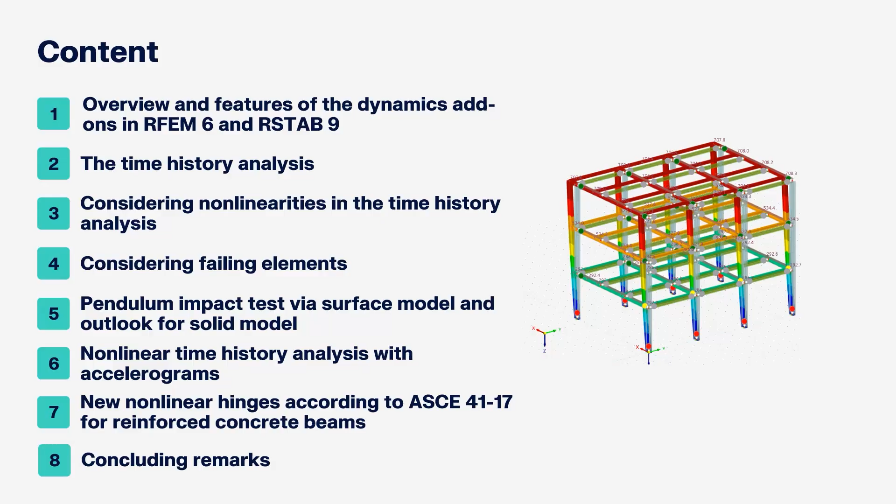Well, this is like always just some tips from myself. So let's go right away with the introduction and overview on our features.

We have the modal analysis add-on, which gives you the opportunity to investigate modal properties of our systems, for example the modal frequencies or the modal eigenshapes and modal masses in general, all that stuff.

Followed up, there's the response spectrum analysis add-on. It creates states of the system according to an eigenshape, and the states have internal forces and deformations. We get these results for each shape, and according to the standard they will be combined, for example with a 100%/30% rule, CQC rule, or SRSS rule. Well, the 100/30 is more for the directions. So in the end, we will get an envelope of internal force results, which can be used further for the design.

Then we will go into the first nonlinear analysis, which is the pushover analysis. First it looks quite complex, but the theory behind it is quite simple. It's two parts. The first part is we get the force deformation curve of the system under horizontal load. So the analysis is quite simple: we just press the system from one side until it either reaches a wanted point or it breaks.

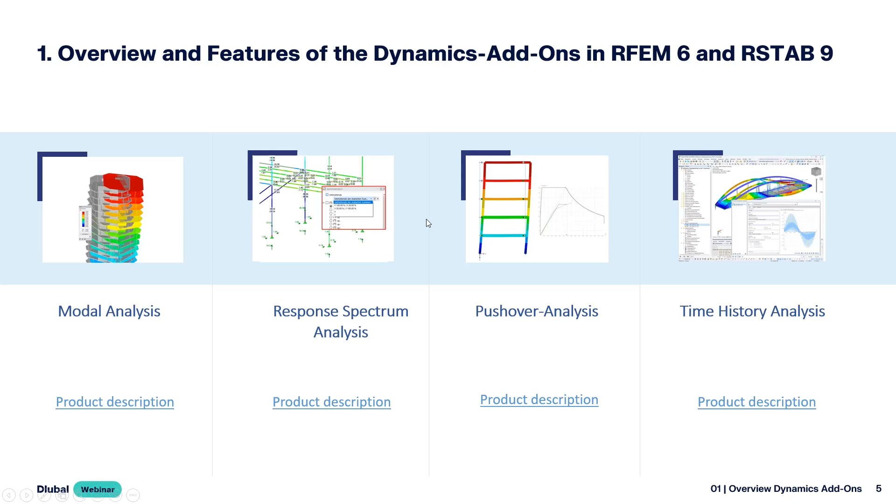But we're going to have a look at that today. So I'm quite happy to show it to you. So let's go on. That's quite a step too far. We're gonna start quite simple.

Let's go within our program. The first thing is we're just gonna validate that simple nonlinearities are considered within our new analysis type. Therefore, I prepared a simple model. It's just a column, a reinforced concrete column with, I think, 30 times 30 centimeters.

5 meters long. It's fixed at the bottom, and also we have two cables, one at each side, and this is what we want to verify.

For the masses, we have the self weight of the system as well as one kilonewton force on top. That will be our mass matrix. And for the loading, we have 100 kilonewton, which we will apply with a simple sinus function of 0.5 times t. So in 10 seconds, it will just go once to one side and once to the other side.

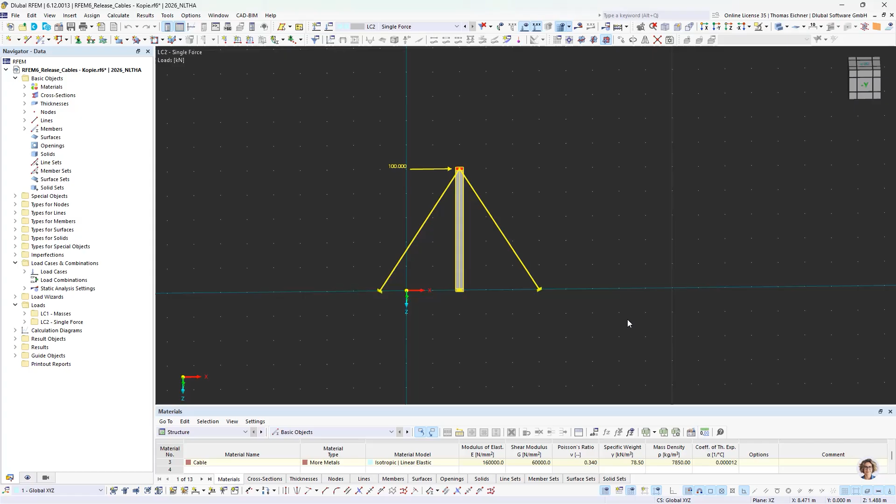What we want to verify is that the cables will fail if they are under pressure. And that's the investigation we will go for first. For the investigation, I also want to show you what is needed for this nonlinear time history investigation.

And that's quite some present, I would say. Let's go for the base data. For our add-ons, there's nothing selected yet. And if we want to go for a time history analysis, we don't care if it's nonlinear or linear, we're just going to press the time history analysis button. Well, the modal analysis is always needed as soon as you want to do anything with dynamics in the program.

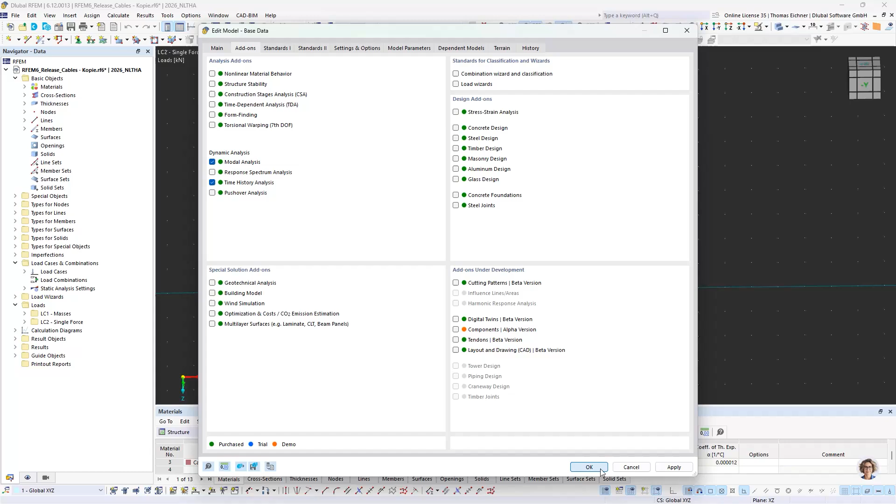So what you can see here, we don't have another add-on implemented. We also didn't change the price of this time history analysis add-on, which means if you already purchased the time history analysis previously, you're just gifted with the nonlinear solver. Also, if you would buy it now, there's no change in price for it. So feel free to get it as long as it is like that, because that's quite a gift, I would say. Okay, let's go out of it.

We activated the time history analysis. And now we will go for the first step. We will go for our load cases. So there are the same possibilities as in the linear time history analysis. We can go for load cases or load combinations of the type time history.

So let's go first with a load case of type time history. So I'm going to copy this load case 2, so I will also have the loading within the load case. Then we will change it to a time history time diagram. Let's name that load case 'time history analysis time diagram'. That's quite cool. And okay, so there it is.

We can select that. We have our masses already selected here, and we can go for our time diagrams. We will go for a function time diagram of sinus 0.5 times t.

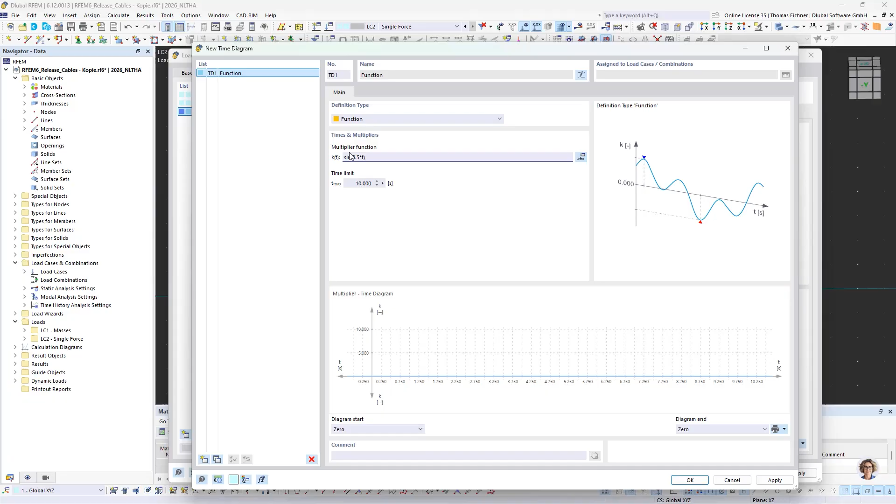Always consider only using points here and not commas. Commas are used for other functionalities in this function. We will go for 15 seconds here, and we will only calculate until 13, that will be enough. The time diagram max limit will be 15 here. So we have two, one in each direction, just for verification.

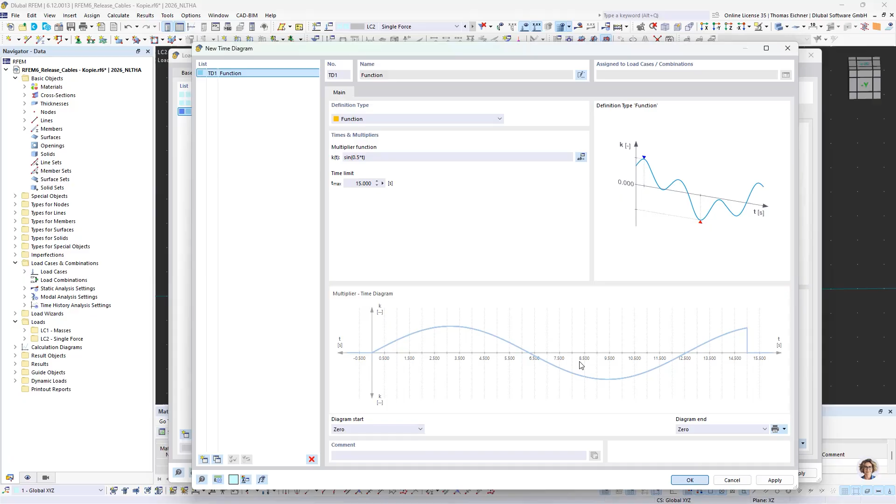Okay, there we have it. This single force load case time history analysis time diagram. It's a long name, let's delete that.

Now we will go for our time history analysis settings. Let's set the linear one first. We have the linear with 13 seconds, and a time step of 0.1 seconds, which is saved. The saved time step we will split even further by 1000 steps.

Since we also have cables in the system, I think I have the basic division of members set to 10. So we have 10 divisions for members, and cables make it quite unstable, so we will use quite some time steps in that case.

For the calculation parameters, I don't really care about the rest. We will only go for the x direction here, and that's all. We can stay with the consistent matrix, even though it wouldn't make any difference with the diagonal in that case.

Then we will go for the damping. The damping, well, I just selected it - there's not too much physical meaning behind it, but let me try to get a physical meaning out of it. Let's say we have a frequency of 100 Hertz. I'm not sure if the system has an eigenfrequency of 100 Hertz, I have no clue, but let's assume it has a frequency of 100 Hertz, which would dominate the structure's response. So I want to dampen this frequency by 10%. That's quite high damping, I would say, but that's the thinking behind inputting that value.

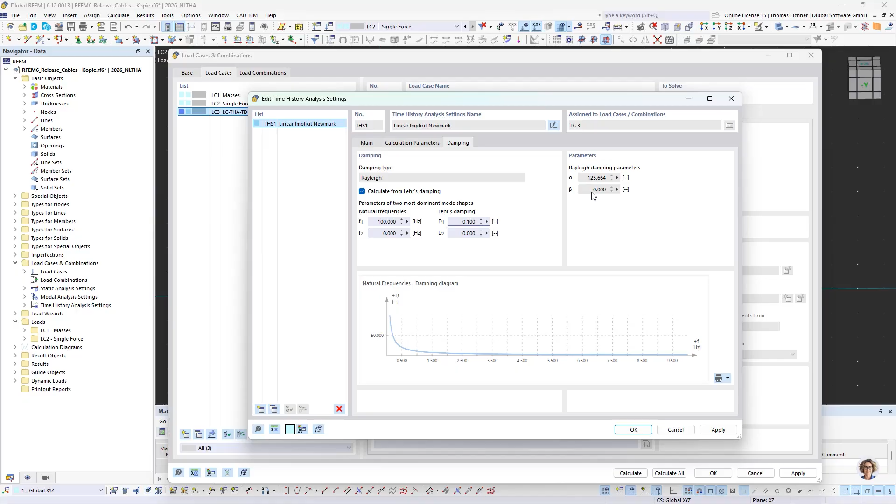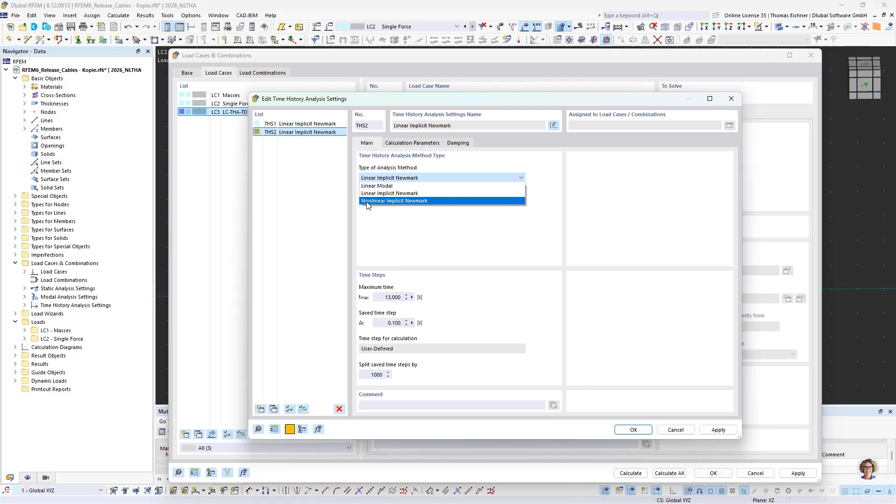Okay, but that's it, it's already done here. What we will do next is we want to do a nonlinear time history - that's all we are talking about today. And it's quite simple: we have the linear settings done, we just copy it and change the solver to the nonlinear implicit Newmark one. And it's finished, so that's quite straightforward and simple.

If you have some systems to test it, just try it out. But also maybe try increasing the time steps as well and play with the beta damping too, please, that will help a lot. Now we will just accept it, and I will directly select this nonlinear solver for this load case.

For the next load case, I want to go with a time history analysis of accelerograms. So with that, also the nonlinear solver, also the same masses, we can select an accelerogram from our library - let's take it from Chile, I don't know what that is exactly. Let's go for some 16 seconds, that's okay. Let's go for the Valparaiso aftershock, for the Chile earthquake. It's quite small, that's okay, just going to take it.

Just to have some accelerogram time history as well in that calculation. Okay, and with that we have all possibilities of the load case time history analysis.

Now we also go for load combination time history analysis, and that's like my favorite. I'm almost only working with those load combination time history analyses for time diagrams. They are not available for accelerograms, but for time diagrams, I almost always take load combinations.

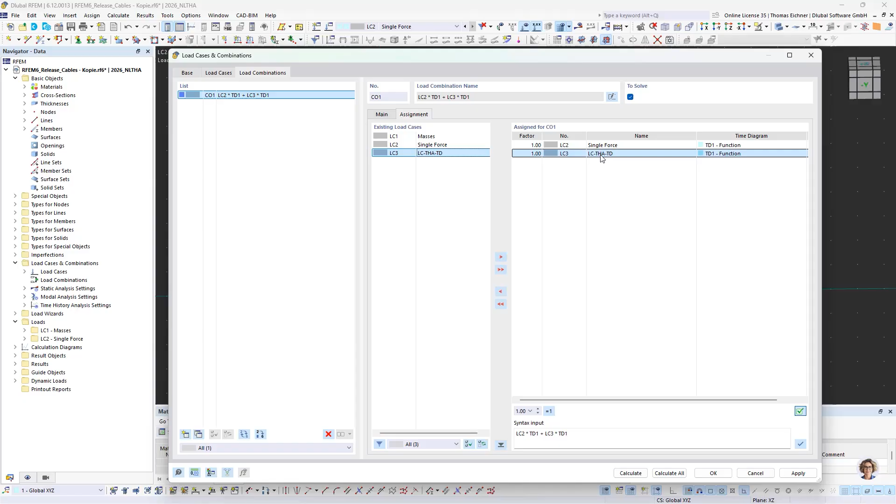We could also go for this direct option. We could use that, and it's automatically filled with the right time diagram that is used in this load case. But we don't need that.

So here we will go for the differentiation. We will make one for the linear time history analysis, and we will also go for one nonlinear. Let's call it CO-THA time diagram, linear. And the second one will be the same but nonlinear, and we change the solver there.

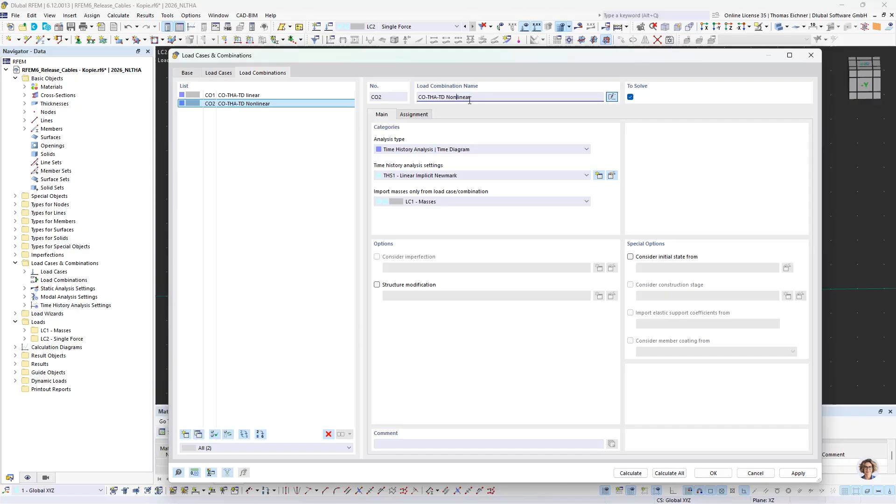Quite forward, that's done. Let's just calculate it. Since it's gonna take 3 minutes and I really want to show you some stuff today, I want to first show you we have 4 time histories. They are all done at the same time, calculated at different cores. That's a difference to RFEM 5, where it would all need to be calculated one after each other, so it's quite a ton faster than the other variant. However, I really don't want to wait this long.

Let's just switch to my prepared results model. I also prepared all the results for our further models since it's needed. Let's go for the results of this time history. We will start with our load combinations linear one.

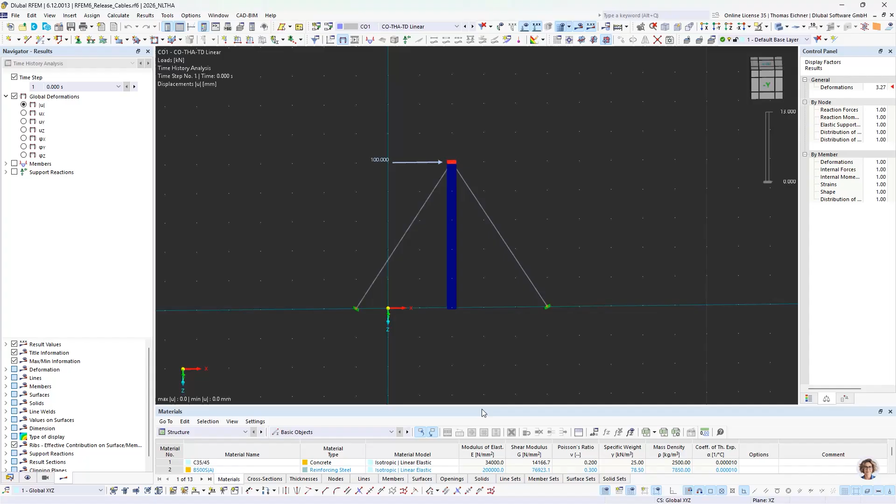For your information, the best way to investigate the results is either using these calculation diagrams, which I prepared here already. For example, we can see the maximum deformation in the graph. Just select the time history analysis here, so you can have the result type time here.

Let's go and create one new one. Let's go for load case 3. No, we want to have the linear load combination, just as an example for creating those time diagrams, those result calculation diagrams. We will go for members, internal forces, normal force of this cable. So the thing is, we wanted to see if it's failing.

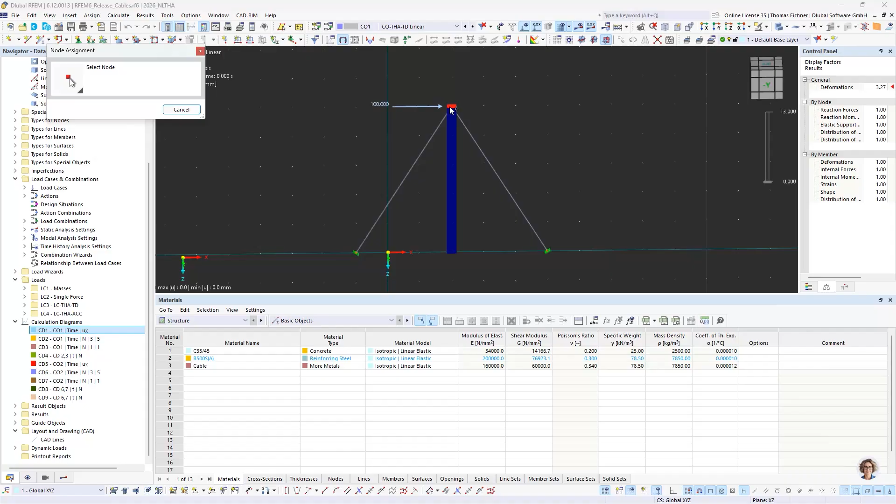And since we are in the linear time history analysis, we see it's not failing. It's first gonna take tension force, and then it's gonna take pressure. So the pressure is just wrong. It should fail here, right? That's the thing. But we will go for a different investigation now. Don't need to change this, don't need to save this.

Let's go for our calculation diagram monitor, which is right there. That's some cool thing, we have the same diagram. We have the possibility to show one calculation diagram while we are in the program. And also, if we now start the animation, we can see it right there. It's also going to show us where we are at, and there you also see the normal force of this cable right now. It's just gonna hold it completely with tension and pressure, and that's wrong.

So now for verification, quite simple, I'm gonna select the load combination 2, and there we have it. There's only tension force, and it's failing at the pressured region. Let's start the animation on that. We also see it's running quite better here. We also have way different, bigger deformations. Well, not way bigger, I mean in the end it's still fixed. It's still a column here, but yeah.

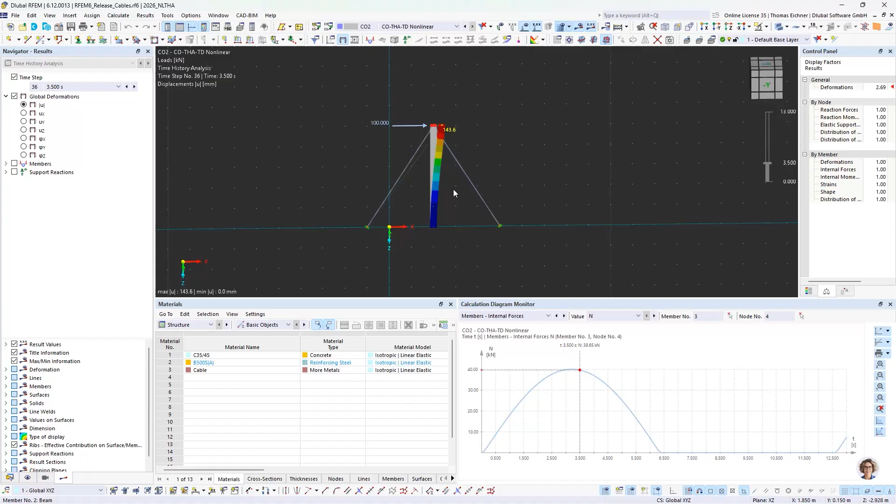That for validation there, validation is done already. We can also go for a short second, let's see at the load case time history analysis accelerogram. We also see here there's only tension forces, never negative normal forces in the cable. So confirmed again. One more thing I want to show you.

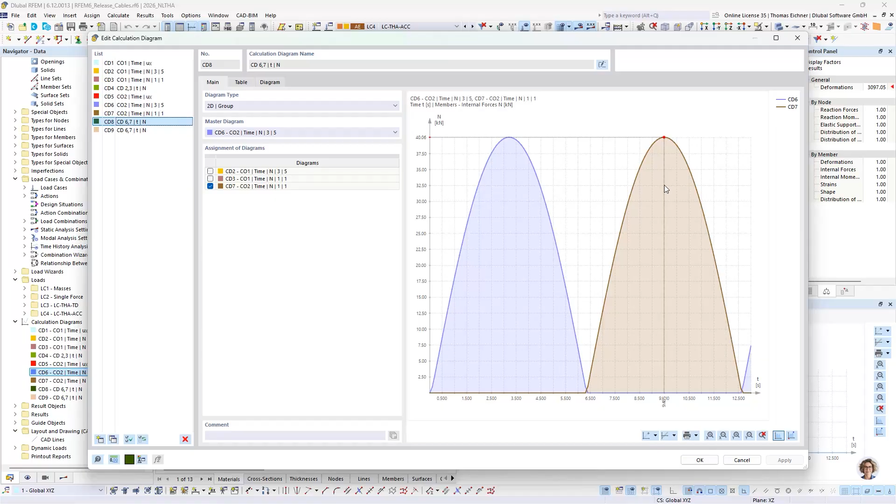Let's go for the load combination 2. This is the normal force for the left cable, and this is the normal force for the right cable. We see it's working as estimated. Also, we have another thing called the group diagram, where we can combine this diagram 6 with diagram 7, so the normal force of the left cable with the normal force of the right cable. And that's quite handsome. Okay, so first investigation done, non-linearity is successfully confirmed. Let's go for the next confirmation.

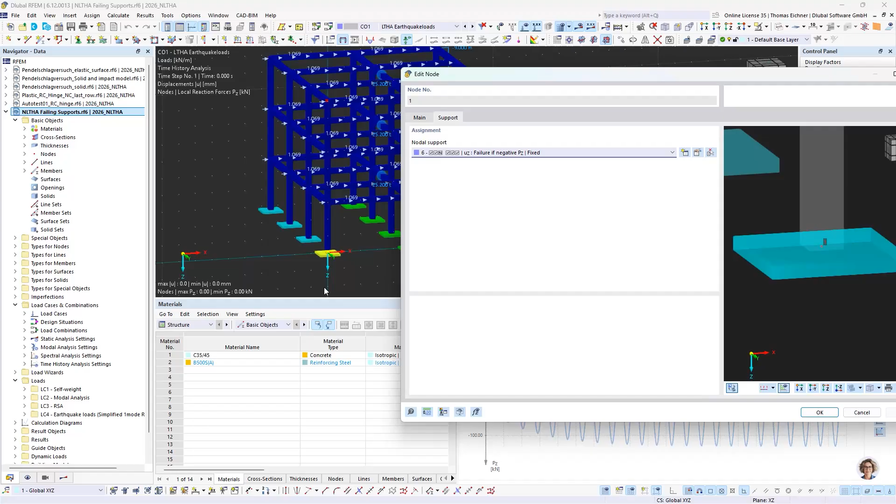And that's gonna be some failing supports. Here you can see I just prepared a model which has fixed supports, but it has failing supports if the force is pulling up. So if this Pz is negative, then the support fails.

Quite straightforward here, and we already see the results of the linear time history with the results of the support force at this left corner here. We see the loading. Well, there's just one flaw I did, I have two loadings that are a bit different, but it doesn't make a big difference. It just is a bit not anti-metric because of that. Let's see how it's going.

I'm gonna start the animation, and we can see now the supports always take support forces in both directions, as also stated in this diagram.

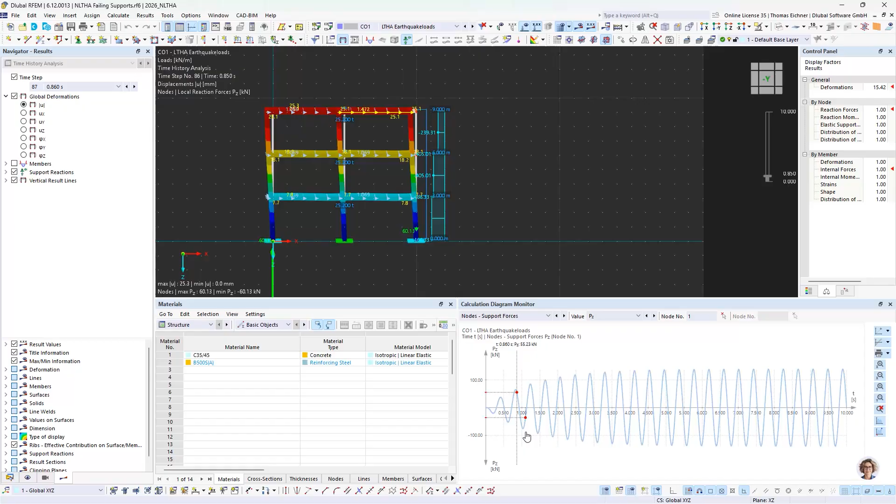What I did here is I just used time diagrams. I did quite some theory crafting on this model. What I did is I just used the first mode, so the first mode of the modal analysis is used here. It's 15.236 radians per second - it's not the natural frequency, it's the omega of the first mode of the linear system.

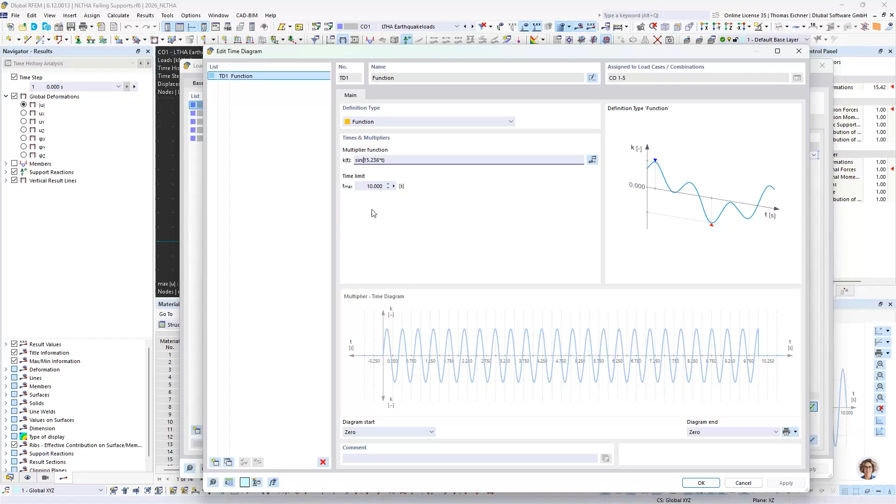I used it here and just applied the loading. I just applied the masses in the x direction. That's what this time history does for linear and for nonlinear. So the same I did for the nonlinear time history analysis.

Let's see here, as we see, it's just like opening up. I also included some damping, so we see it's kind of rising - it's always starting up and then the damping comes into place and it stops rising. I'm missing a word for that, but I think you know what I mean.

So let's switch to the nonlinear time history, and we would estimate these forces only to be positive. Let's go and see it - yeah, there it is, only in one direction. Here it's shifting, here it's shifting. We're going to increase the deformations by 100 to see it better. Now we see it's lifting up and going down again, and then this side is lifting up. So the next nonlinearity is confirmed by that investigation.

And now we can continue with the good stuff. For the good stuff, we have the pendulum impact analysis or simulation in this case.

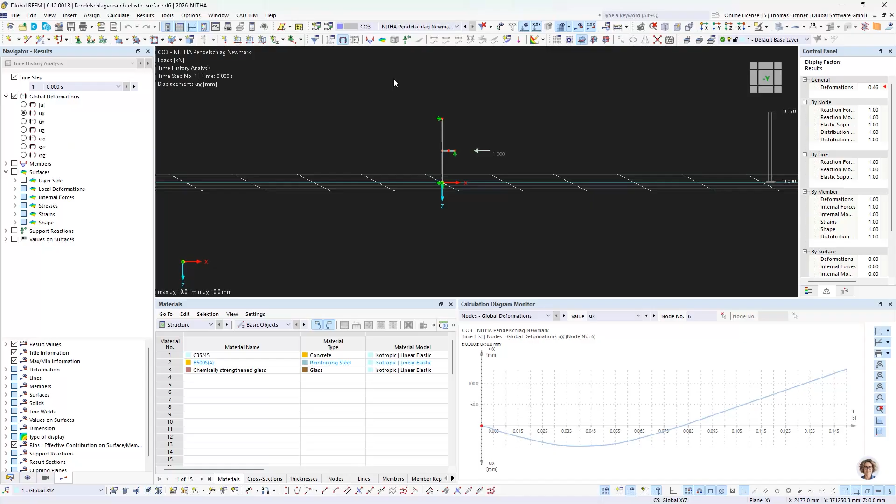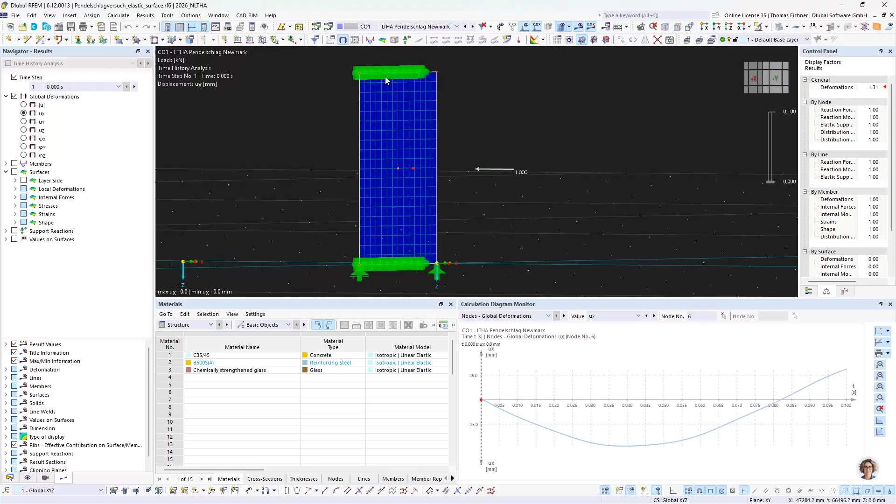Now I want to go see here. Okay, perfect, let's see first about the system. What we have there, this should be a glass surface - it's just one surface, chemically strengthened glass, 8 millimeters of thickness. We have 1 meter height and 70 centimeter length, and it's supported on top and the bottom with line supports.

Now what we want to do is we want to have this bang, this impact. Let's see what it means - that's what we're going to do. So that number 3 here, that's our surface. You see this system here, that will be our impact model. Let's go back to the presentation, so it's going to be this stuff.

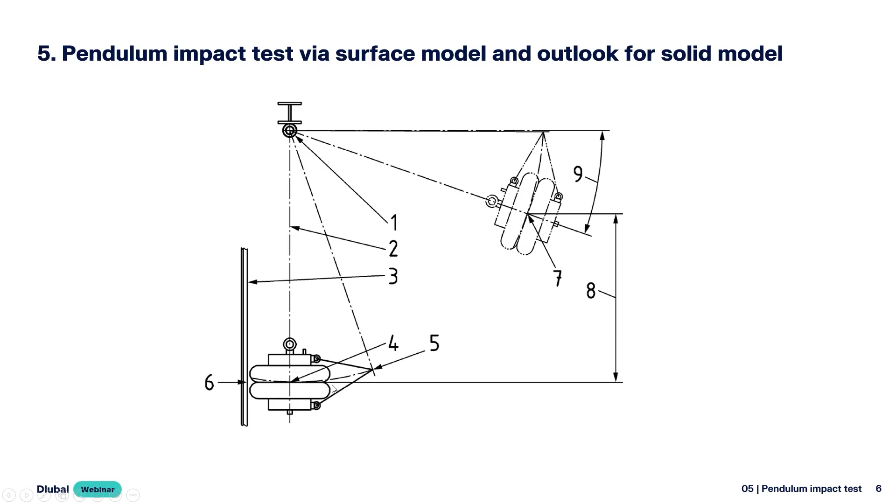The real procedure is we would have it hang up here, lift it up, and then it would be let loose and it would bang against the surface. It would just bang and then go back again - it wouldn't go there and then go there again and again. That's not what we want to simulate. It would just bang once, get away from it, and then it's away. That's what we want to simulate. So for the energy, we will see this in the results in the end.

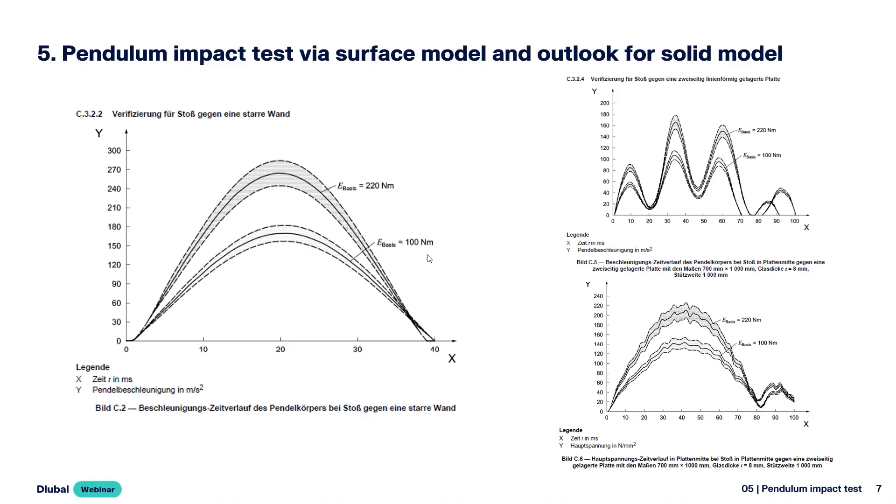However, what we can see is we will go with an impact energy of 100 Newton meters. So what we want to have is at the impact, we want to transfer 100 Newton meter energy. So how can we achieve that? Well, we know we have this impact system which has 50 kilograms - that's the mass of the impact. I think it's a tire which normally is weighted with a medicine ball, something like that. So that's the system, and it has 50 kilograms, and it has roughly a stiffness of 400 kilonewton per meter.

That's also going to be in our stiffness there. So now we know the energy of 100 Newton meter. With that, the law of conservation of energy, together with the impulse theorem, we can calculate a force F. I did leave out some intermediate steps, because the force F can be derived from the impulse change over time - so there are some formulas missing in between, but that's what's behind these formulas. The time which we take, we just pick it - we decided it's 0.001 seconds. And with this 0.001 seconds and this derived formula, we can have the mass that is needed to achieve this energy.

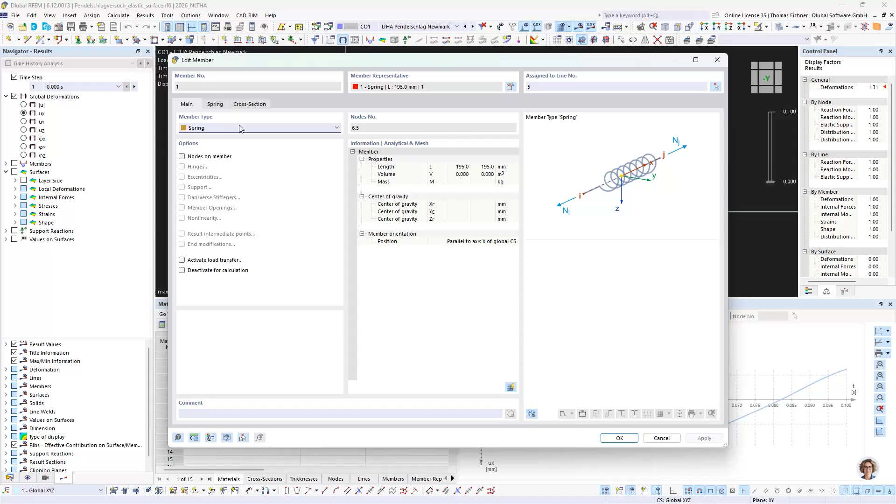Then we have the system of our tire, in this case a really simple system. It's just a spring, and the spring has a stiffness of 400 kilonewton per meter. It has no mass itself. We defined the 50 kilogram itself in our mass load case on one side.

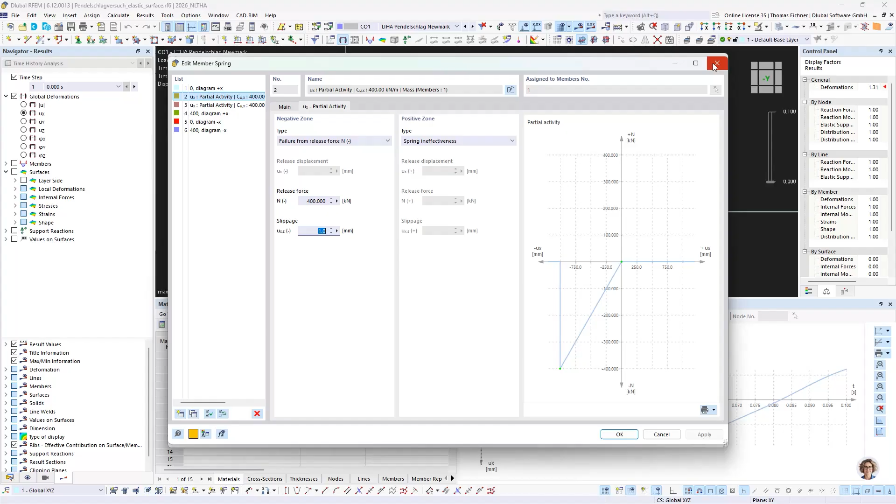And we have a partial activity, which means we can insert also a slippage of 1 millimeter. So that's the distance we need to accelerate to this 2 meters per second. And we also have a spring ineffectiveness in the other direction. So it hits, goes with the structure. Let's go out here. It hits it, goes with the structure there, and if it goes back and is not linked anymore, then it's ineffective. So that's how we make sure that it goes away after the impact.

Okay, and now, well, that's quite straightforward, and that's it already. Now we can go for the results and investigate on, well, I already calculated it. Maybe we can go also for our time history analysis settings.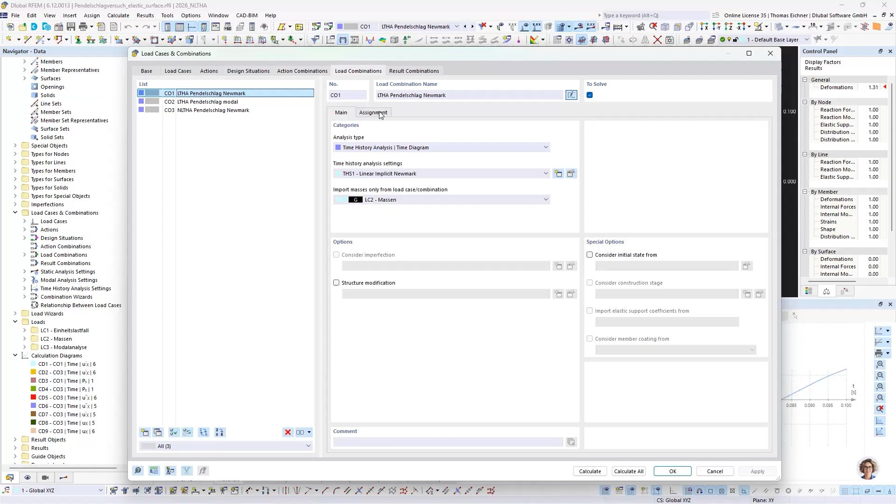So as I said, we have the masses defined in our mass load case 2. We have our unit load case with 1 kilonewton. Now we will go for a load combination where we defined, well, they are all the same. The only difference will be the time history analysis solver. So we can look at the assignment. What we did there is we have our unit load case, which has 1 kilonewton, and we assigned it with our Pendelschlag, it's a pendulum impact in German. There we have the 0.01 seconds, and we have this multiplier with 100. So that's what we do there.

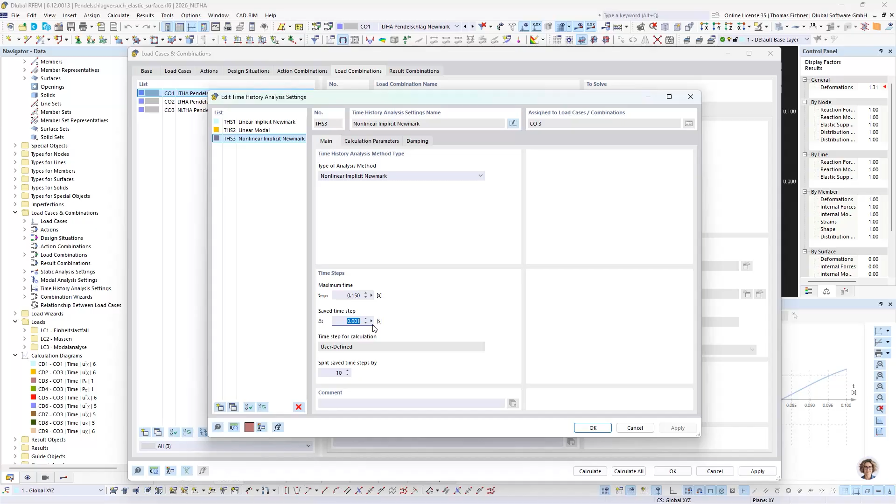Okay, done with that. We can go and look at our time history settings. In this case, I always looked at all the time steps and splits are the same, but we don't need that precise ones for the linear one. However, I just picked it the same. So now we have times that we will calculate, 0.15 seconds long. I think that's different, yeah, I did it for the nonlinear time history. I did it longer, I will show you why. We have a saved time step of 0.001 seconds, and we will further split it by 10 to have more calculation time steps. For the calculation parameters, it's a diagonal matrix with all components.

Damping, I think we don't have any damping in this case. I didn't go for damping here. We could also try to estimate some damping, but I didn't try for it yet. So okay, but with that we are done already. Well, the modal one, we can just ignore it. We won't look at that. It's gonna be the same results as the Newmark, it just needs a modal analysis first.

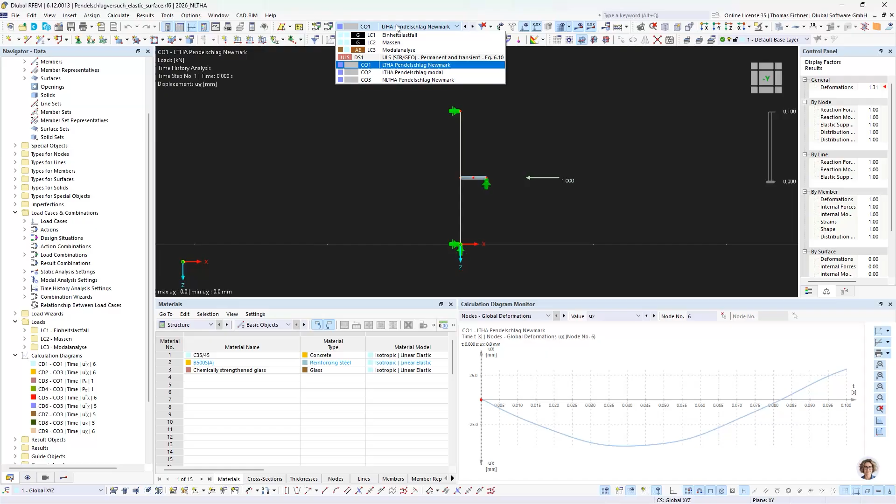Let's go for the results now. We will see the Newmark one, and we will see. Let's see, this is the UX of node 6. Node 6 is this one here. Yeah, but let's just start the animation. I will just override it a bit so we can see more. Let's factor it with 5 and start animation here.

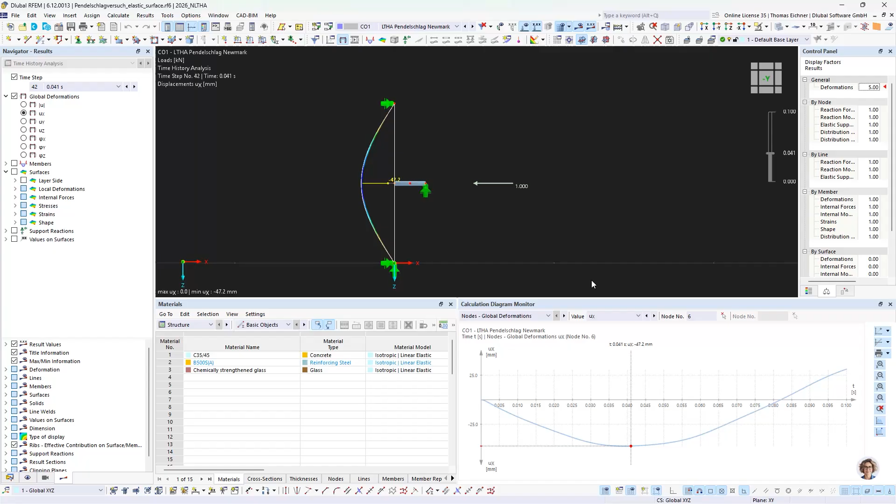Now we see it's gonna make the bang, and then it's gonna rotate a bit. The thing with the linear one is our spring non-linearities are neglected. That would mean it would still be connected in the end, and it would shift sinusoidal, it wouldn't be split after the impact. So this would just go up and then down again. For the velocity, maybe let's go for our time diagrams.

There we see it. We see here our almost 2 meters per second, which is a bit off since we also don't have this 1 millimeter slippage. It doesn't have too much influence, to be honest, but it's just a little bit off because of that. Maybe a more precise time step would also help. But what we see here, we go and there it should stop. We know this negative way shouldn't occur. That means the ball comes back again, kind of. And that shouldn't be. It should be constant here. So it's not connected. This means it's connected with the surface and it's gonna be pulled back by the surface.

That's not wanted. Now we're gonna look at our nonlinear time history. And there we see some difference. It's not gonna go this sinusoidal way. I mean, okay, it's 0.05 seconds longer calculated, but also we see here some change. It's not linear, right? And if you change it for the nonlinear one, we see it's just linear at that point. So the deformation of that right-hand side point is just rising, meaning this pendulum kind of is just going further and further away with the same velocity.

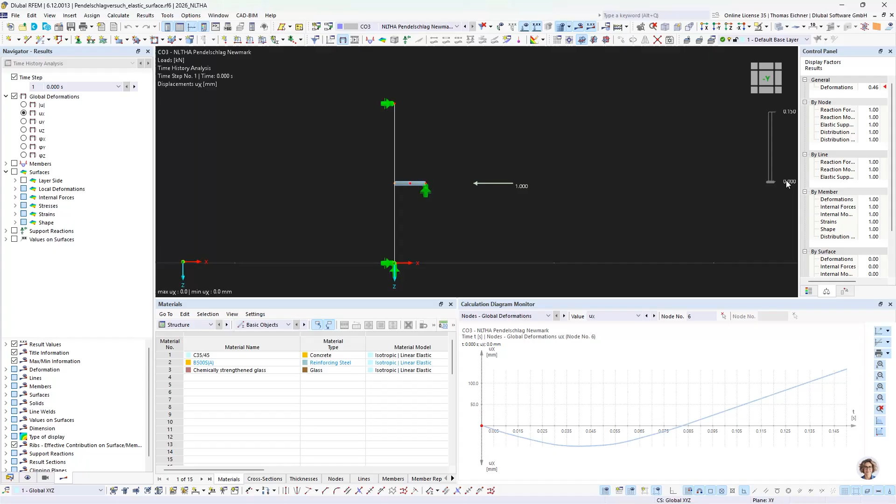We can also try to get this other point on the other side. Let's go for this. That's the point on the surface. There we see how that is going, right? It's not going further away, but it's just like vibrating in the end, the surface alone. We can also try to get it on the linear time history. Yeah, there, that point, well, it's connected. It's not right, to be honest. It's quite hard to interpret in that short time. Okay, let's stay with the nonlinear one.

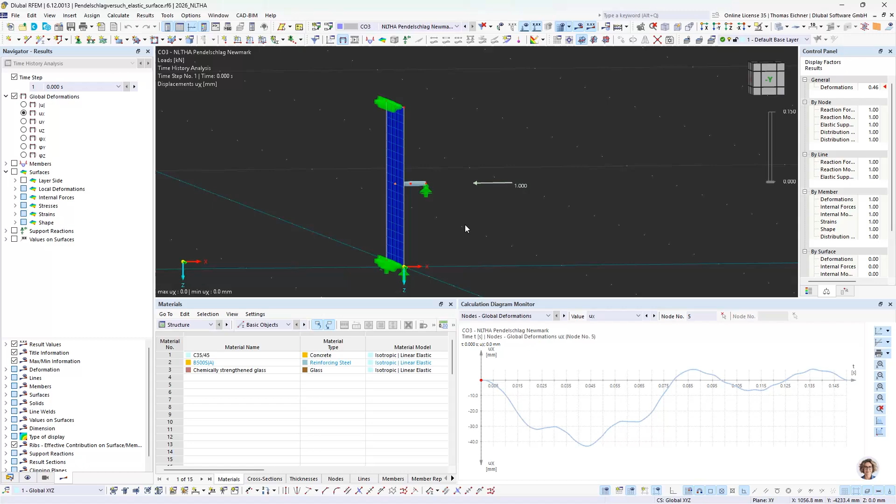And with the nonlinear one, we can also, I will stay inside that point. Let's go for node 6. Let's go for the velocities in that point. And we will go for ux, and there we will see this 1.99. It's quite close to 2.0 meters per second. That means our first theory was confirmed. We have this impact energy of 100 Newton meters, since we have this 2 meters per second. And what we also see is this constant velocity in the end. That means at that point, they are not together anymore, and like the system on the right hand side, the pendulum is just going to travel further and further to the right.

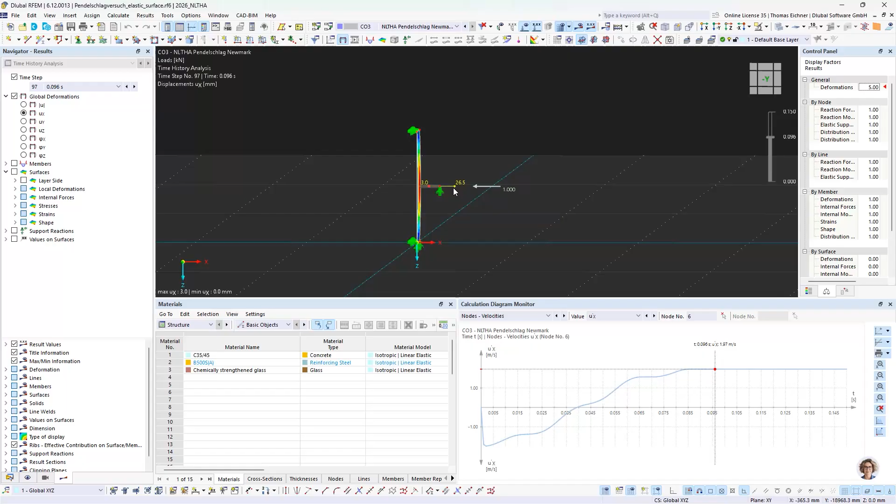Let's look at it also. Let's do it a bit bigger. There we see it. Now it's kind of together. The stiffness plays a bit of a role in the difference here, and then we see it's going to move. And yeah, it's quite working fine. We can also change the animation speed here a bit, so it's a bit too fast. Well, now it's not fast enough. Let's go here. Yeah, that's a bit better. There we see the stiffness just has some impact here for the relative between those. Now it's gonna shift and just move away. So that's confirmed again.

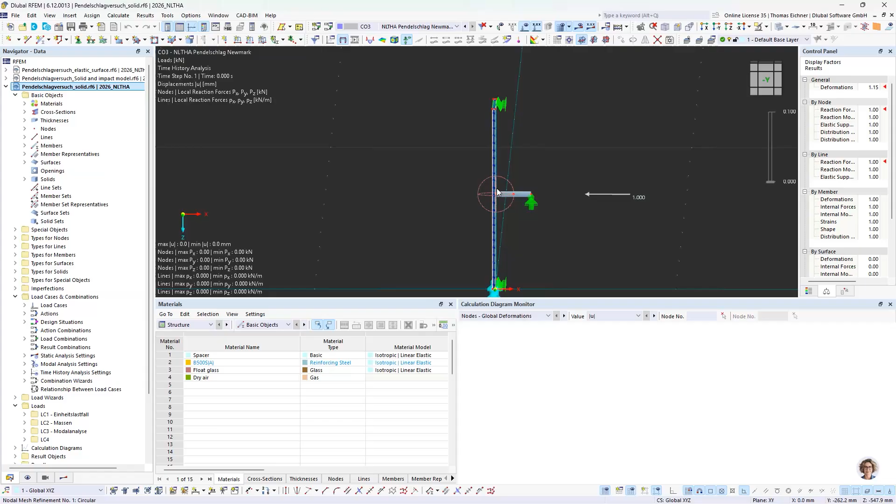So let's jump for the next model. It's the same model, but it's solid. Now on that model, what we did is we included also, in that case, double glass surfaces on both sides, and in the middle we have like air as a solid. So this is the solid model of this structure. It did need some mesh refinements here, and I also did some iterations for getting the results as they are now. We will just go straight forward, and we will go for the nonlinear time history analysis.

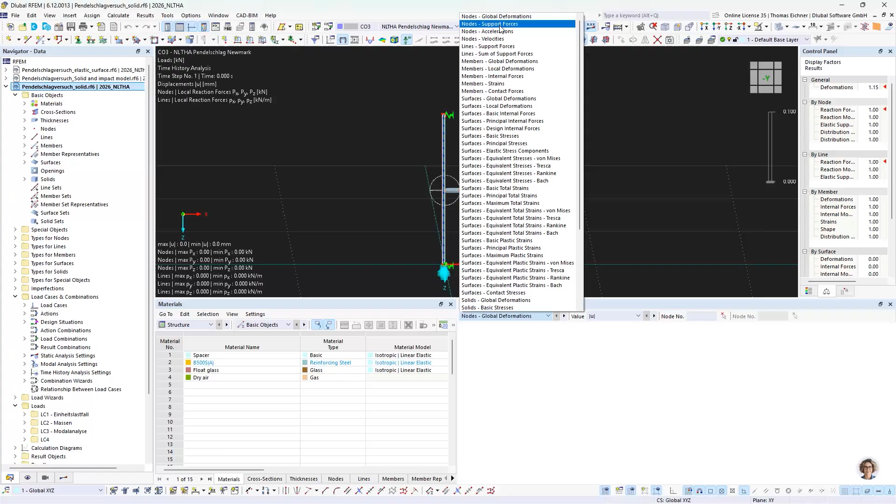And we will just go again for our velocities on the point. And we will have quite the same. You see, well, in that case, it's only calculated till 0.1 seconds, not till 0.15, but we see how it's not changing at that point anyway. So also that is working quite fine. We have also this 1.99 meters per second, so that's quite nice. Let's go for the animation in that case. We also see how it's like moving the whole body here. This whole solid model is going to be moved and it's going to go back. We see this behavior is a bit different to the surface model, especially since this is way more stiff.

Okay, and it's just for presenting you. It's quite a powerful analysis type.

What I want to say here anyway is we do not have everything in our automatic tests. And it's something we did here. We have warnings implemented. Just because there is a warning, we didn't want to block features. Let's say, for example, surface contacts with whatever nonlinearity. We don't have an automatic test for that yet. So we just want to hint out what is within our automatic tests. So whenever there's something not tested, you will find such a message here. But it doesn't mean that it is not working.

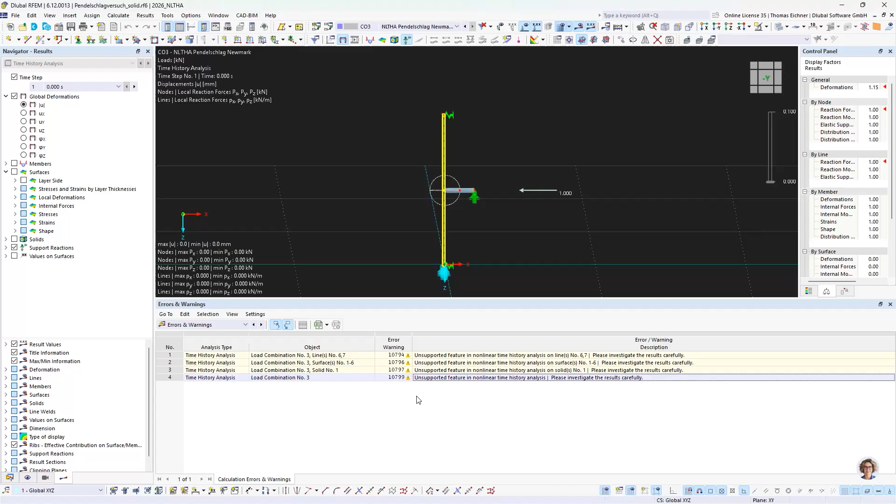It just means please investigate the program on its plausibility. We have tons and tons of features, and it really gets customers to use anything with anything, and that's sometimes dangerous for some customers. I want to have this warning displayed, just to hint out: don't trust a program blindly. I hope most of you understand that.

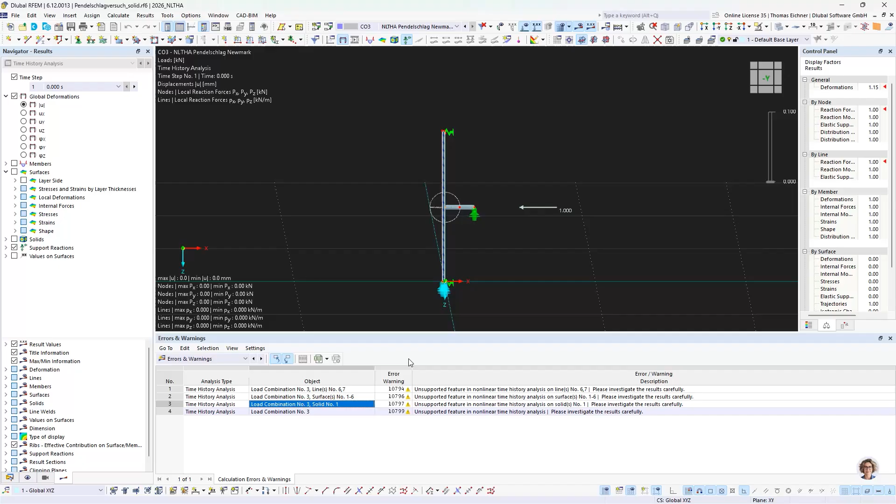So for that we also implemented a feature showing where the untested stuff is. For example, here we have the surfaces, or the most simple one is the solid, because we didn't test the solid yet in an automatic test. We just tested it on its plausibility.

Also, there are overall warnings. For example, imagine you are trying to use a torsional warping 7th degree of freedom with nonlinear time history. Nope, that's not tested yet. I'm not sure when it's going to be tested, because that would need some new studies, I would say. So there's a lot of stuff you can combine, but please investigate them carefully.

So now for the last of this pendulum impact stuff. I didn't get this to calculate quite far. Yeah, it's still getting my assert here for the changing.

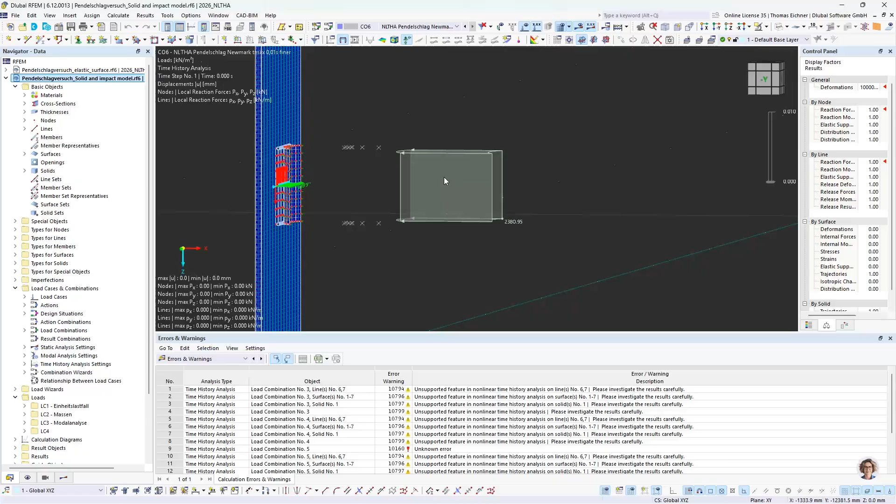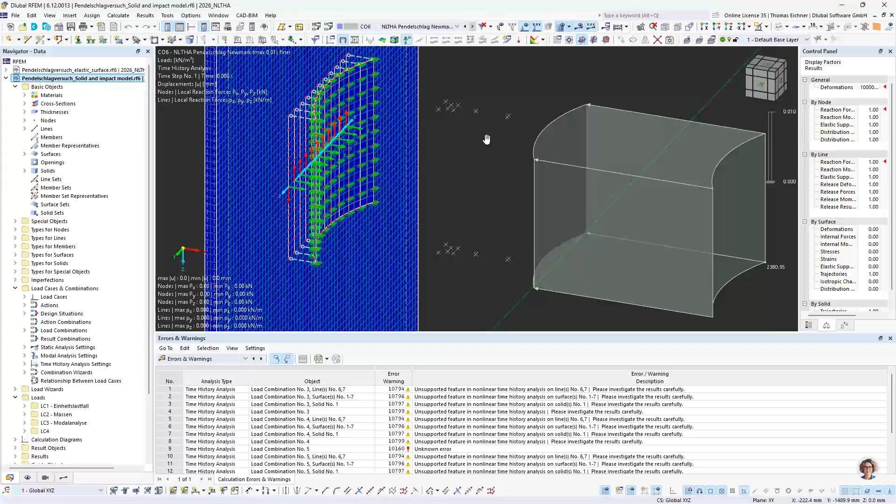That's something where I tried myself on modeling this contact more exactly. In this model I tried it with our rigid link, which is a link between two lines. There's another test where I tried it with single links at each node. It worked a bit better - well, to be honest, I don't know if it was better. I just investigated it in more detail with more complex mesh settings and time settings, but that was an iterative process. What I can say is like 2 elements doesn't seem enough in between those, and also the time settings seemed not enough for this detailing.

Okay, so I hope this was a fun bang into this area.

And now let's go further with our performance-based design. Let's see, do I have another? No, that's not. That jumped too far. Let's go for that here.

We will go now for, I want to show it in RSTAB 9, since in RSTAB 9 we also have something different there. We have a different solver than in RFEM 6. So in RSTAB 9 there's this nonlinear explicit one instead of the nonlinear implicit one. It's 2 solvers, one is geometrically linear and one is with large deformations.

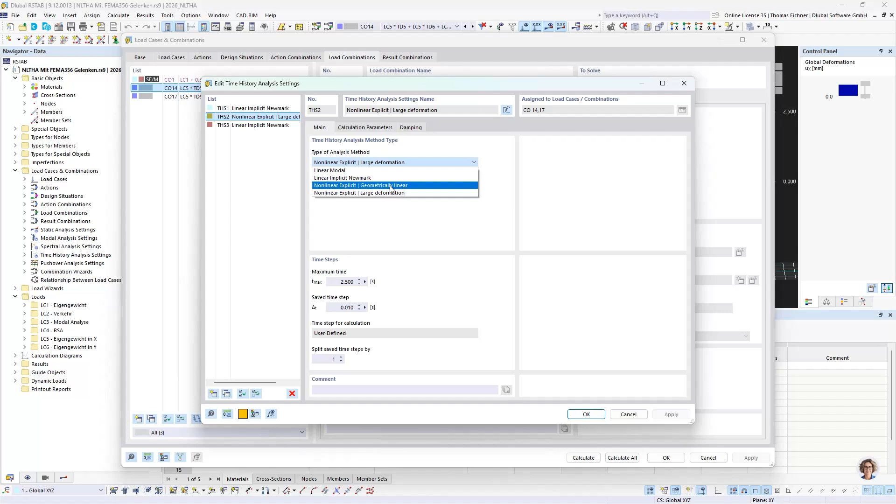As a hint, even though it's called nonlinear explicit, it has some benefits within the solver which relate to the implicit Newmark one. So it's not purely a nonlinear explicit one, but that information is not completely clear for me. It's going to be in the handbook, so please feel free to look at that. What that helps with in the end is where other solvers would get unstable, which I will show you right here. It's going to help.

So for this model, just for your information, this is related to the performance-based design topic, where we're going to try to do nonlinear time history analysis for earthquakes mostly. Within that, maybe just as information, I didn't use it here, but you can always use structure modifications to modify stiffnesses and everything, to get from characteristic values to estimated or mean values or correct values and so on. You can also use it for your modal analysis. So this feature is completely there for you.

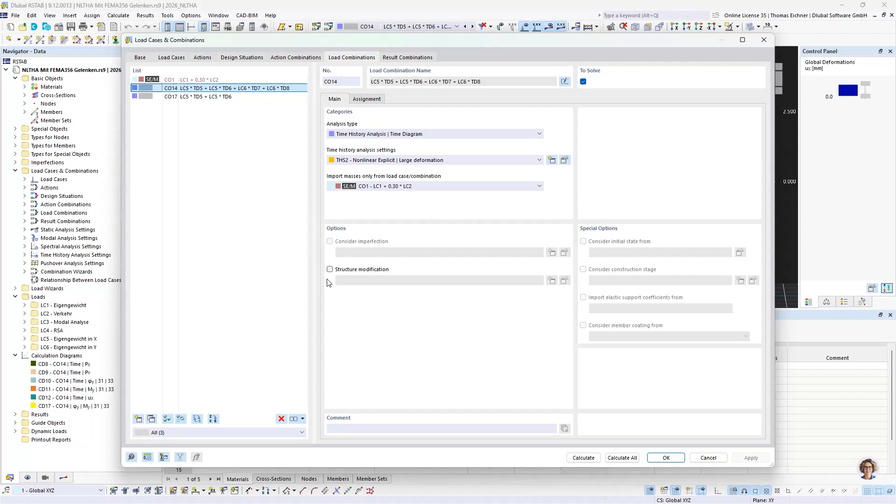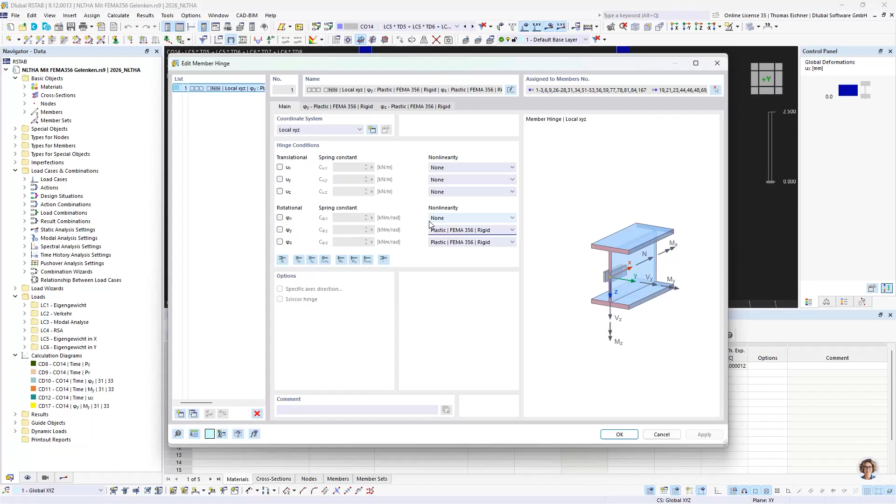Then for this feature, there's also these hinges - nonlinear hinges in this case. In that case, I just used the FEMA 356. Later on, I'm going to show you the new ones, this ASCE for reinforced concrete beams, according to 41-17. In this model, we use the FEMA hinges. We also see this acceptance criteria and so on. You can also define everything user-defined if you want to, and also the coloring there.

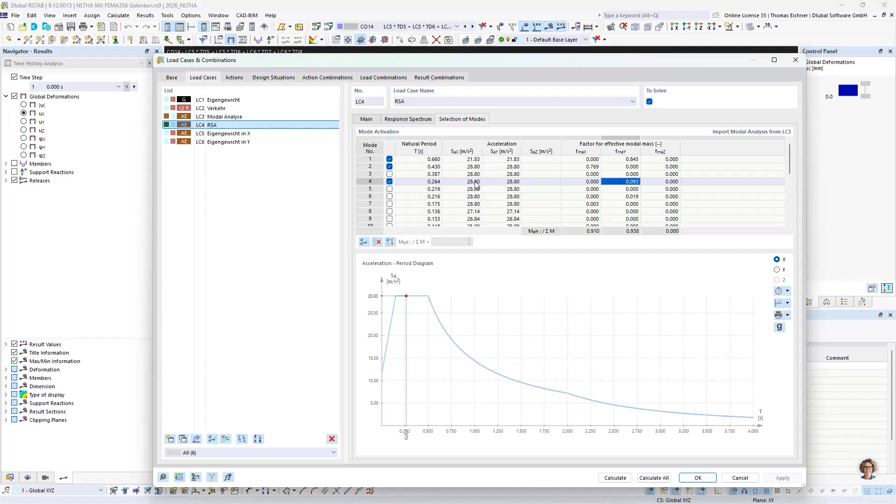Let's see, we will just go for a nonlinear time history. Well, that's the model where I did some tests. What I did there is I did a modal analysis, I did a response spectrum analysis, and I got information on the modes. So I did a nonlinear time history in the end where I said 0.845 times this acceleration of the first mode. I will apply with this frequency of the first mode, and then I will also use this mode with 9.3% with that acceleration and that period and so on.

Let's look at what I mean here. Here you can see it. I used the self-weight in X.

It shall be taken with the frequency of the first mode. The first X mode, and I scaled it with the effective modal mass of that mode and the acceleration of that mode. That was my attempt to compare those analyses with each other.

It wasn't that successful, to be honest, and I will investigate further for sure. But that's the analysis we do here. We have two frequencies in one direction, two frequencies in the other direction, and we will just go for the comparison.

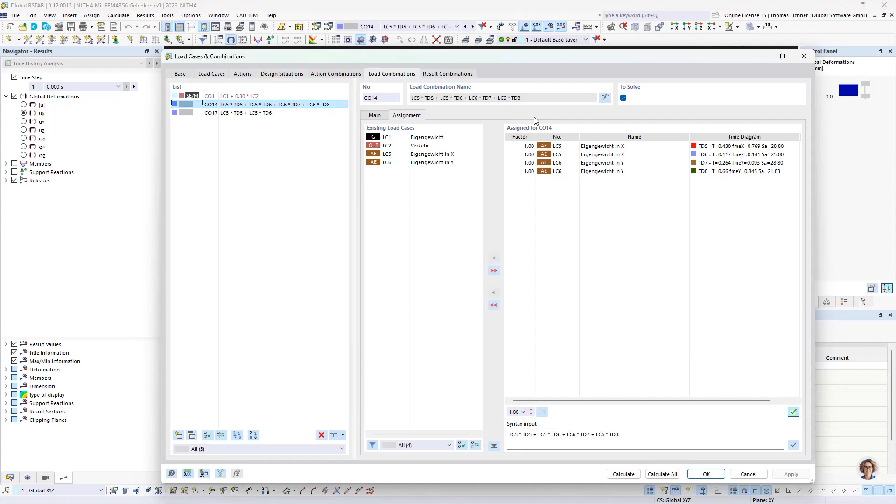I think for the RSA there's a Q factor of 1.5. I didn't take that into account in any way, so that could be one of my mistakes. But yeah, let's look right into the results.

We can start the animation, and there we will see how it's gonna go. For the left side, we can see the acceptance criteria changing. Let's see, maybe for the results we can decide if we want the acceptance criteria or the diagram zone. I will go for the diagram zone.

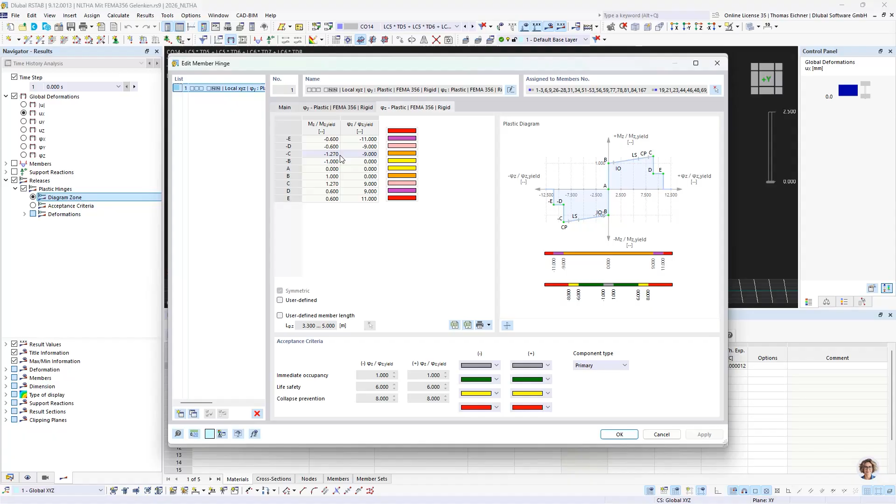Let's shortly look at the diagram zone. If it gets red, then this hinge completely broke. If it's purple, then it's still at 20% or something of its capacity, or 40 - not sure for the FEMA currently, for steel. It's 20 for reinforced concrete at least. Let's go for that and start it there.

Now we see it's red there, that's red, red, red. And that's the moment, 0.38 or something was that.

We can also look here and see the overall deformation. Here what we see, the hinge is broken, this hinge is broken. Every hinge in the system is broken. Am I right? Everything broke, yeah, I'm right, everything broke there.

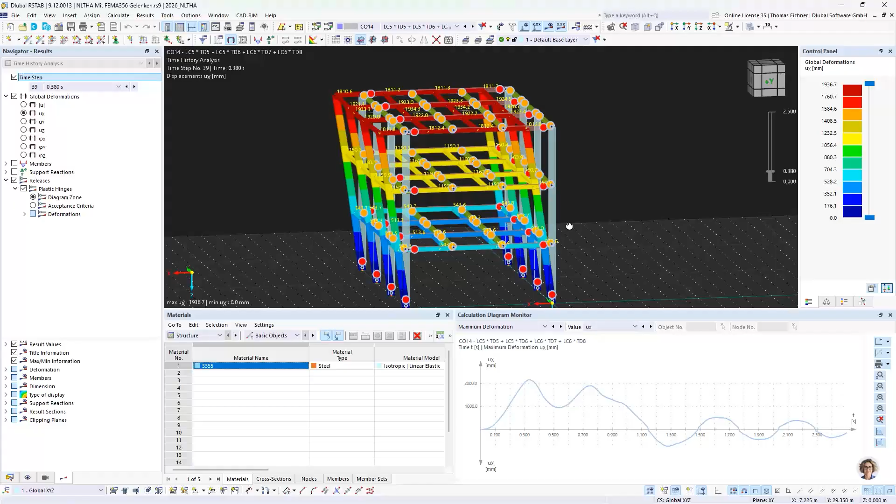So that's where the system gets unstable for some solvers. That's that situation, at 0.38, for example. But with this mix of solver, we can have it kind of moving freely anyway and still capture the movement, so that's a benefit of that solver type.

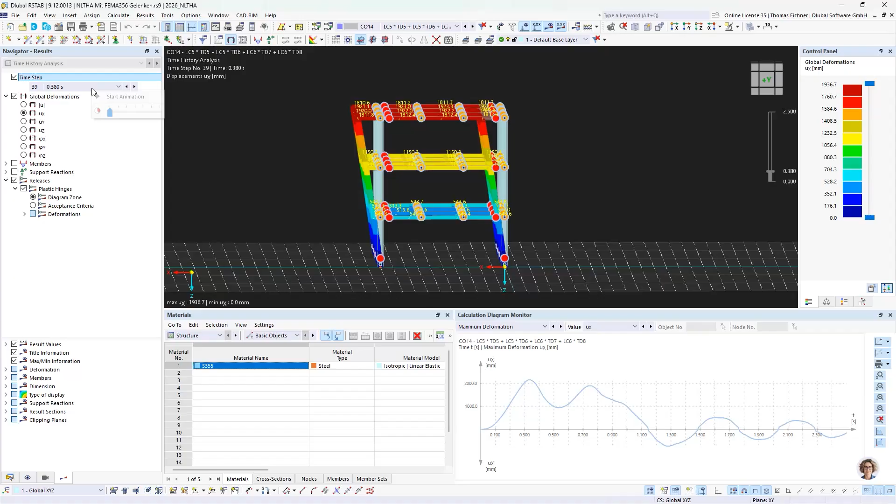Well, and then it goes back, and it's gonna go, yeah. I think the figure explains itself at that place, and I don't really need to explain further.

Exactly. Maybe for the cyclic behavior, we don't have direct cyclic behavior considerations there. So I don't know by heart - I think it's the normal kinematic one, or isotropic. I don't know it currently by heart, I will search for that afterwards.

So anyway, this cyclic behavior is one of our next topics, as well as the initial state topic. So it's gonna follow up.

Okay, so that's the goal for the investigation for our performance-based design. We can also look at, there we see a bit of our goal there. That should be our cyclic behavior, but you see it's not as I wish it to be yet.

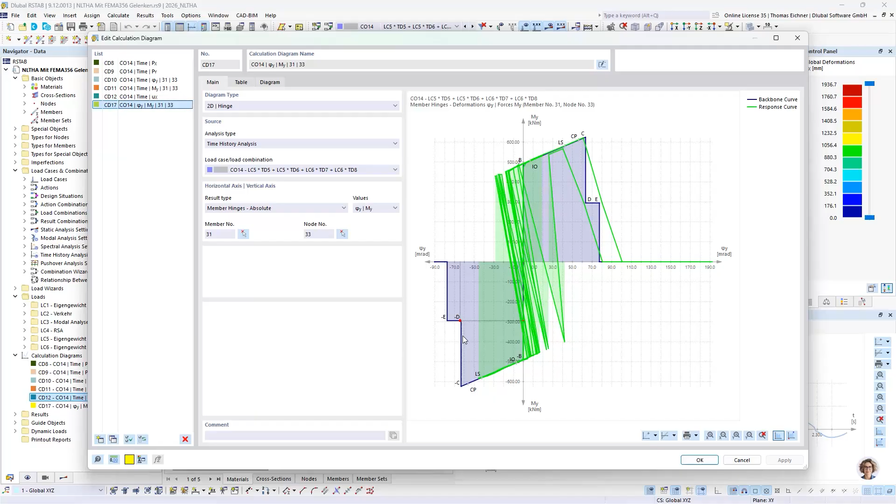In the end, we will have the backbone curve as well as the cyclic behavior within the diagram. That's the plan to go. What we see here is that the nonlinearity of the hinges is considered at that point, also with the maximum moment.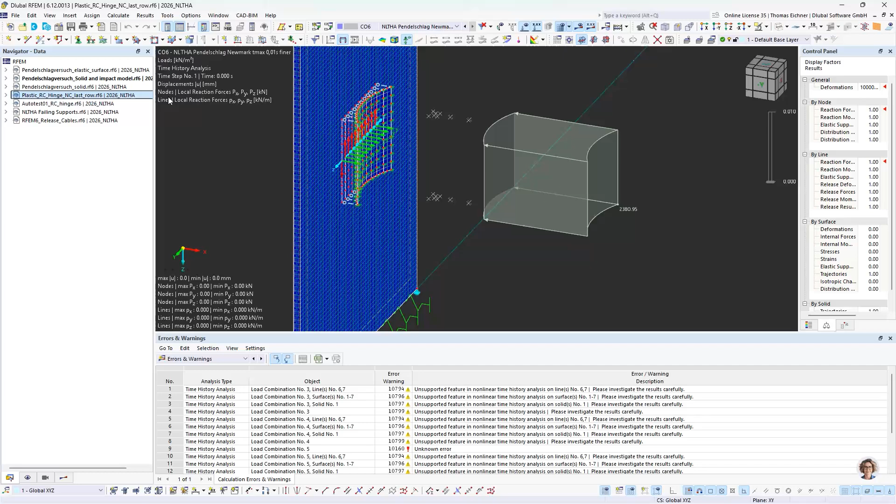Okay, so that's it for this type of performance-based design. Now for the last topic, I think I will leave out how our auto tests work for it because the time is running out. But at least I will be able to show you this simple test for our reinforced concrete hinge.

Let's go for the results first, because we can currently see the behavior of those hinges only by results. So we will go here. That's the backbone curve of our hinge. We have a reinforced concrete beam here.

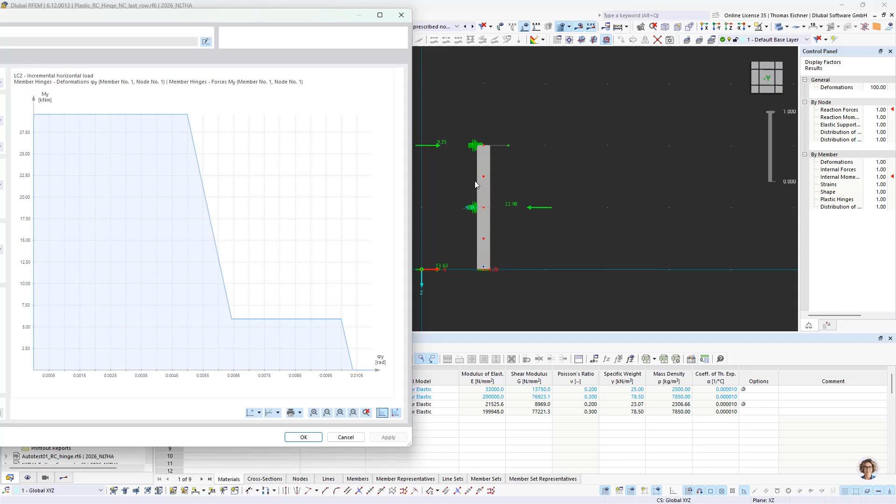I made the analysis as prescribed nodal deformation, so deformation controlled, and I also made it force controlled. But what's this one? It's the force controlled one, but it's also working because I have a nice system for it. Let's say it this way - here at the bottom, there's the hinge. We also have two supports here, so it will be stable even though it goes further than this point. That's how our solver would say it's gonna be unstable.

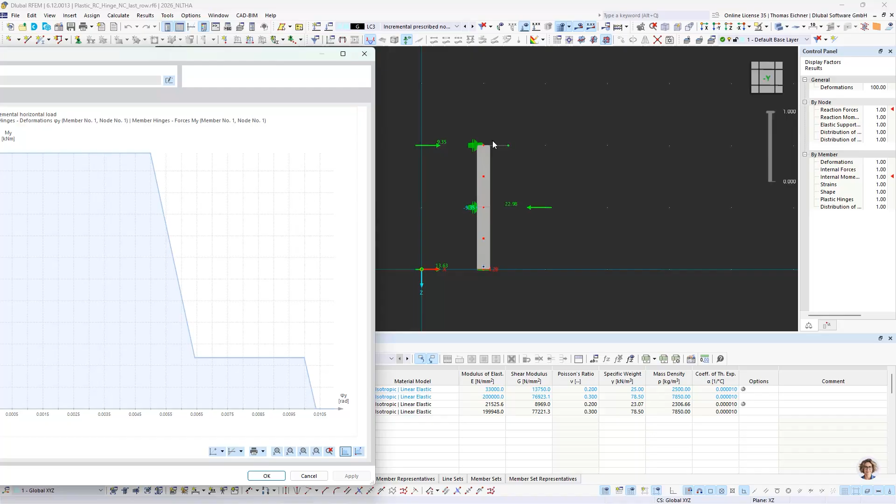Now what we do here, we will increase the loading on this. Okay, wait one second, I need to change it for the horizontal load. We have the load on top, so it's going to rotate and it will cause a moment at the bottom here.

This will lead us to this graph of this hinge. And this hinge, as you can see, the MY, it's about 30 kilonewton meter. It will be shifted at 0.005 rad, so 0.005, we will remember that. There it loses its strength to 20%, and we will also remember the 0.01 rad, there it loses it completely.

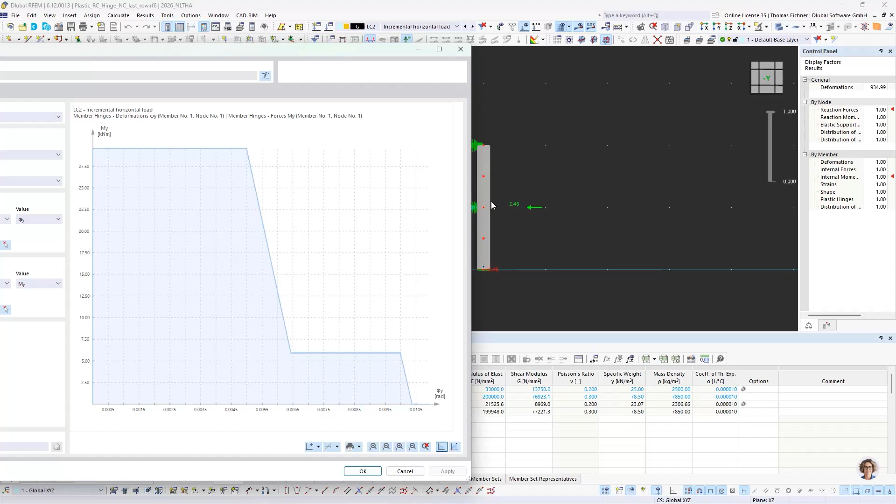So now let's go into this table. At the bottom there's some automatic testing, so I tested it for different scenarios. On the top right side we see this table for that specific test. We were in the last row here, so we see the A value, which is 0.005 rad. The A value gives the plastic deformation until it gets to 20% residual strength. And we see the B value, which is 0.01, and we also confirmed that inside the program.

Well, as you can see here, the hinge, let's go for that again. The hinge is just placed pretty simple. We're gonna go for hinges. I'm just gonna pretend that I'm gonna create a new one.

Okay, but one important stuff for now, maybe this here should be fixed. But I think this was already a bug, but it's already fixed as far as I remember, so this shouldn't change anything anymore. But previously, it only worked if this here is fixed and then you select the ASCE one, so you select this ASCE/SEI 41-17 hinge within this nonlinearity.

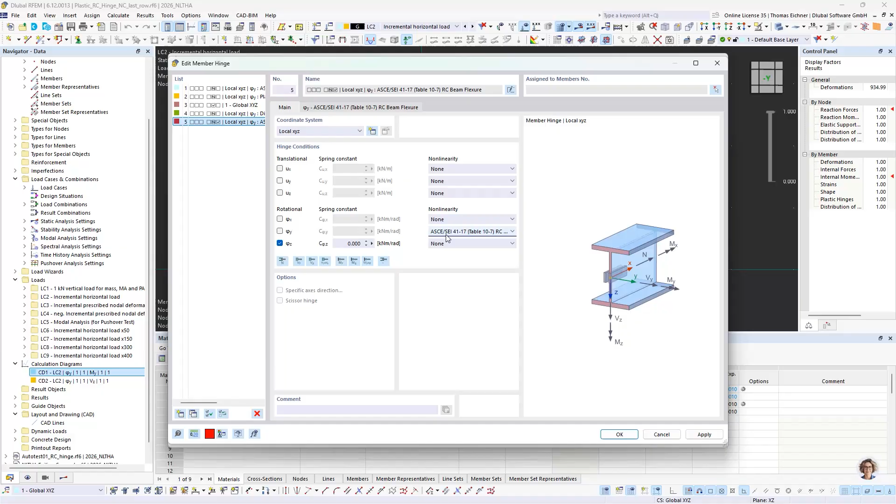And then you have some information, but not really a lot of information, since the information is only gotten after calculation. That's why all of that information will be in the tables. It's not there yet. Currently, the only way to investigate on those hinge results is via those calculation diagrams.

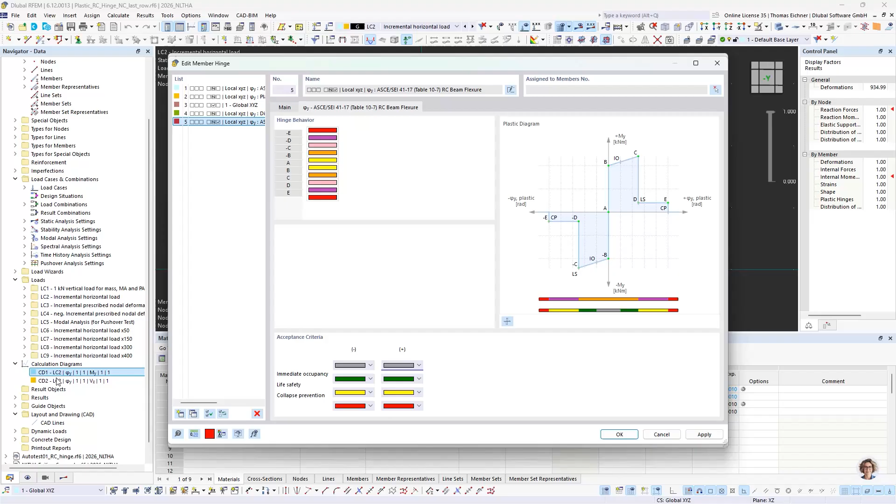Okay, so that's how you set it. One more thing is it's working for multiple materials. In this case, we used the ACI standard. Let's go for base data, concrete design.

You will always need to have the concrete design add-on active and either the time history or pushover analysis add-on active. These are the requirements for those hinges. And for them to work, the material needs to match the concrete design standards.

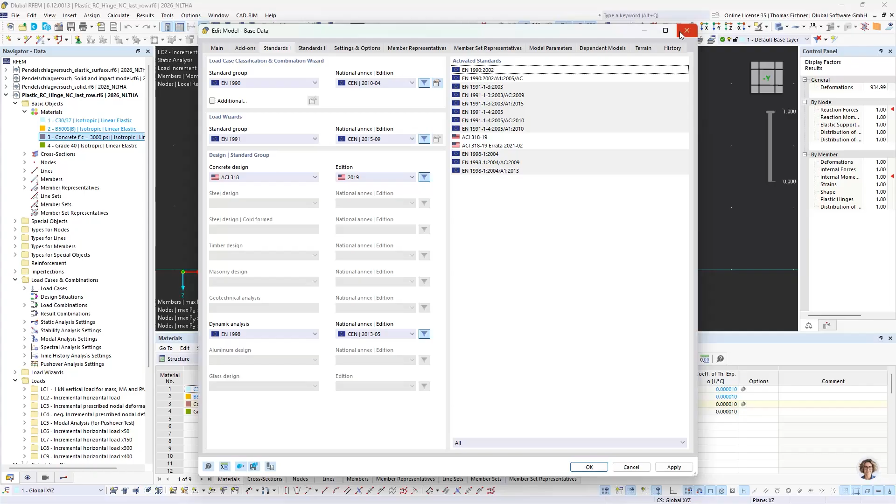So you can't combine like Eurocode material with ACI standards, because the yielding moment will be calculated from, well, it needs to match. It's the same as the material needs to match the concrete design add-on in the concrete design add-on itself. So the next thing is what material value is used.

We see here the material values for ACI is f'c. We have this 20.684. You can also make it user defined and change it there. I think there's no estimated values there yet, so this value is the one that is used.

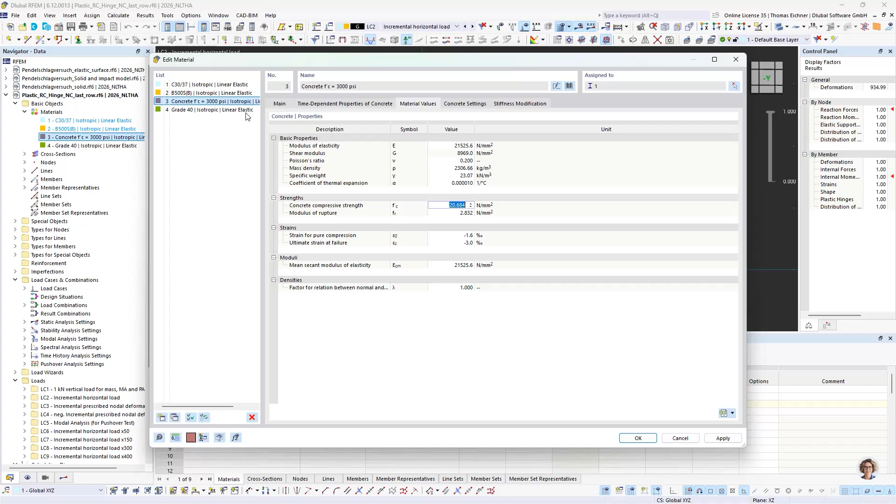For Eurocode material, that's a bit different. It's gonna use the mean value, because it's the European estimated value, kind of. Even though the formula is quite awkward, it's just 30 plus 8. So if it's really the estimated value, I adopt it, but yeah, I'm just not knowledgeable enough to say that, to be honest.

Okay, but anyway, here for the hinges, the FCM is used and not the FCK. So the general rule is if there's a mean or estimated value, it should use it. If there's none of that, it will just use the standard value.

Okay, and that's about it. Then maybe one more thing, even though we are a bit over time, I'm sorry for that. Let's go for our automatic test.

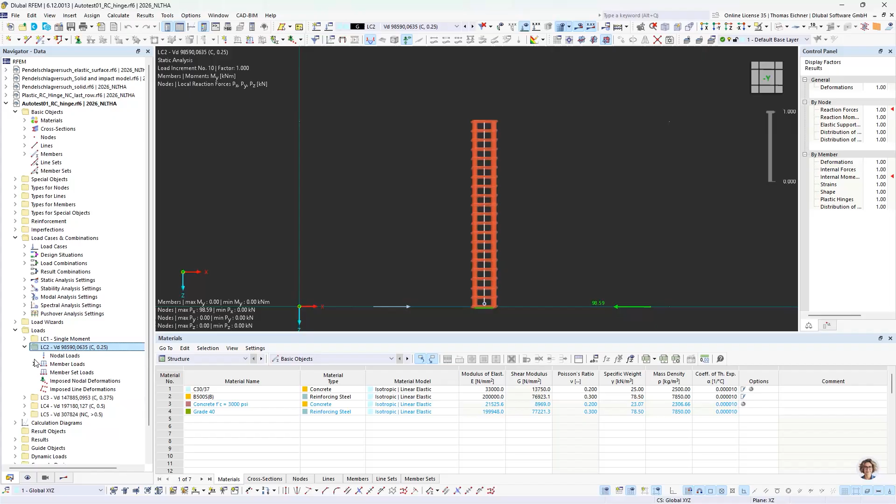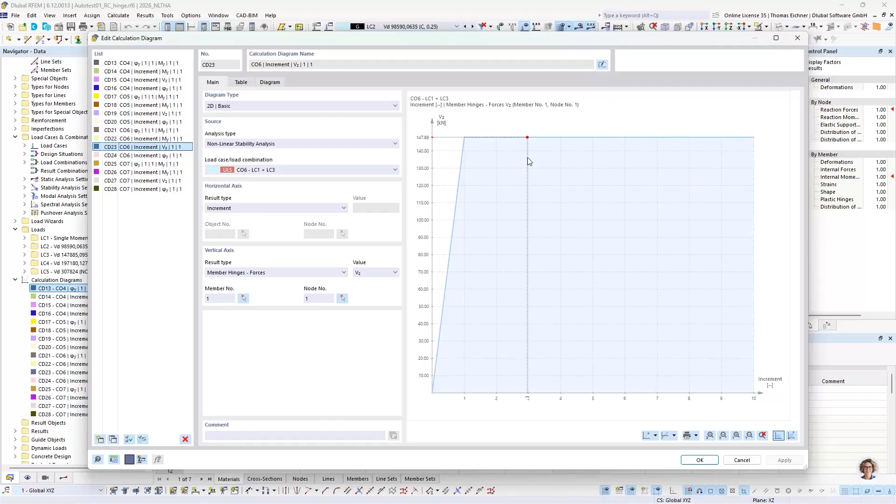That's something different, because those hinges are special in their behavior. There's always, as you can see, I did several load combinations. The difference is I changed the shear force, and the shear force for the first one is, for example, 308. For the second one, it's gonna be 99. For the third one, it's gonna be 148, and so on. So this test investigates on different shear forces for the hinge.

I selected this, this is kind of part of our automatic test system also. Well, it's a bit more complex than our automatic test system, because in the automatic test system, it is even reduced in the calculation. Within here, we just calculated some points on the most top part. Then you see here 0.005 to 0.01, it drops to this 20% residual strength. And at this 0.01 to this a bit higher, it will drop to 0.

V is the design shear force from NSP, so for pushover or time history. It uses the actual shear force for its behavior. That means the hinge behavior is also iterative, which is kind of one more non-linearity and makes it quite complex. But it's working. That's quite cool.

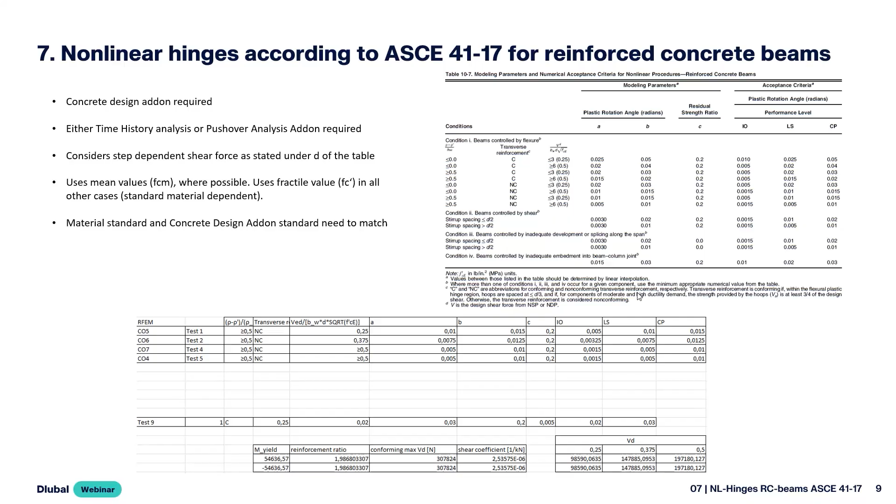And let's go for the last thing, some tips for the nonlinear time history. One thing is the nonlinear solver is kind of gifted for the time history add-on. No additional purchase is needed. Everyone who has the add-on already can just use it, so feel free to try it.

Then we have a warning implemented if something is not within our automatic tests. So as soon as the warning is there, just use it with caution and use your engineering judgment. The big benefit is we didn't want to block any feature, so everything is possible, even though it is not recommended for all combinations, to be honest.

That's the next tip from myself. It's something I call the Bausteinprinzip, the modular principle, for the validation, because in RFEM 5 I got lots of customer models which just had tons of non-linearities mixed, and they just said it's not converging. That's quite hard to investigate where the problem is. So please insert one non-linearity or one problem after each other and investigate its plausibility. Otherwise you just get stuck with tons of calculation time or convergence issues, and it's gonna take more time than building it up like that.

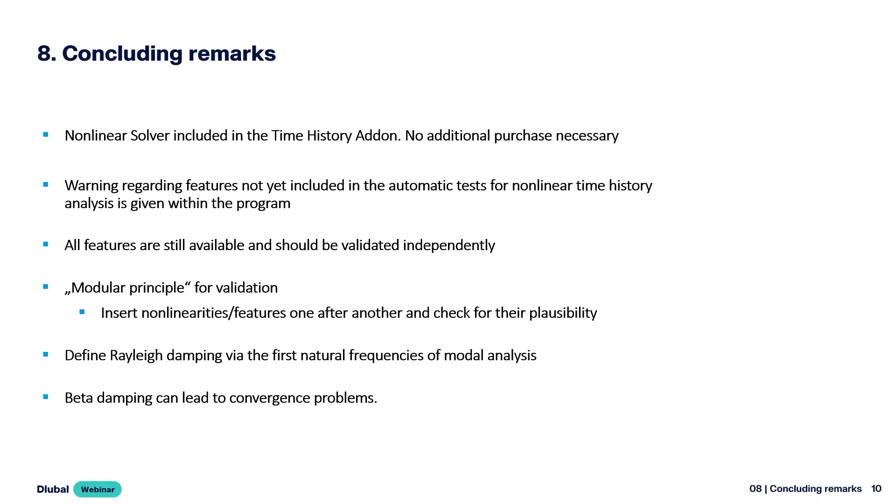So, that's all from my side. Thank you for staying a bit longer than the normal time, but I think there was quite some stuff to show you, and I think it was a cool webinar. It was a cool first webinar of the year, and this analysis type really makes fun for me. I hope it will for you too, and I wish you a really great start into the year, and I hope this helped a bit. So have a nice year. Bye-bye.